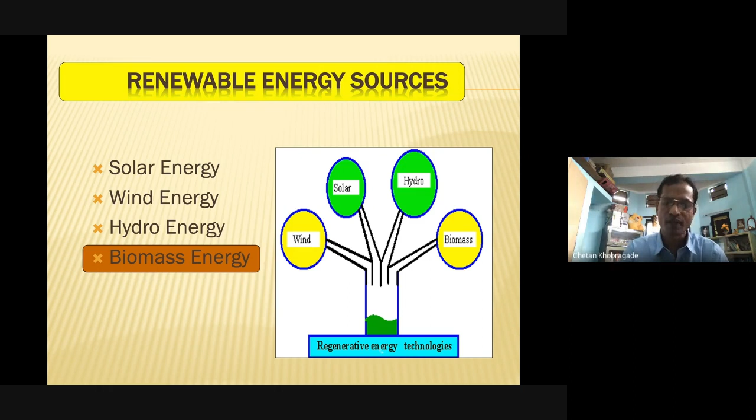Now, what is biomass? Biomass is basically obtained from plants and animals - roughly, you can simply say it is the waste of plants and animals. The exact technical definition of biomass is that it generally refers to renewable organic matter generated by plants through photosynthesis. Materials having organic combustible matter are also referred to as biomass. It is one of the important fuel sources in the world energy scenario.

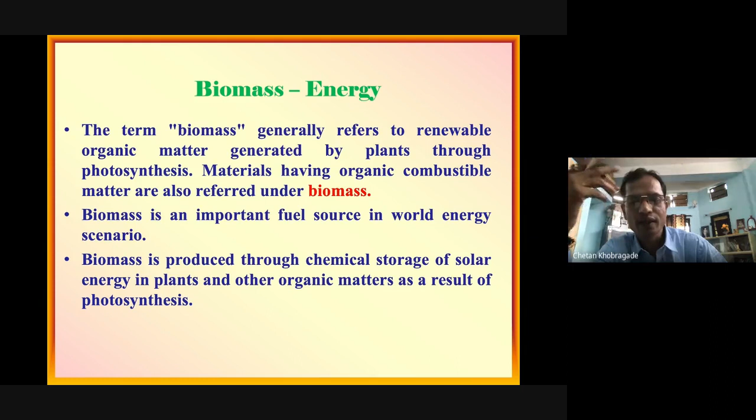It is produced through the chemical storage of solar energy in plants and other organic matter as a result of photosynthesis. Now, this is the present scenario of biomass availability in India. The availability of biomass or agriculture waste is in huge quantity, widely spread all over the country. As far as our country is concerned, total biomass available throughout the year is 1,250 million tons annually.

If we go for power generation from this 1,250 million tons, we can produce 17,000 megawatts of power from this biomass. At present, the government has promoted biomass-based power generation systems for decentralized power generation in the rural sector. Up till now, only 273 megawatts of power has been produced from biomass. This means we have so much scope.

Throughout India, per year we get 1,250 million tons of biomass, and if we convert this into power generation, we can produce 17,000 megawatts. But at present, we have achieved only 273 megawatts. This means we have abundant scope to convert this into power generation - we can go for power generation. So this is the clear picture from this slide.

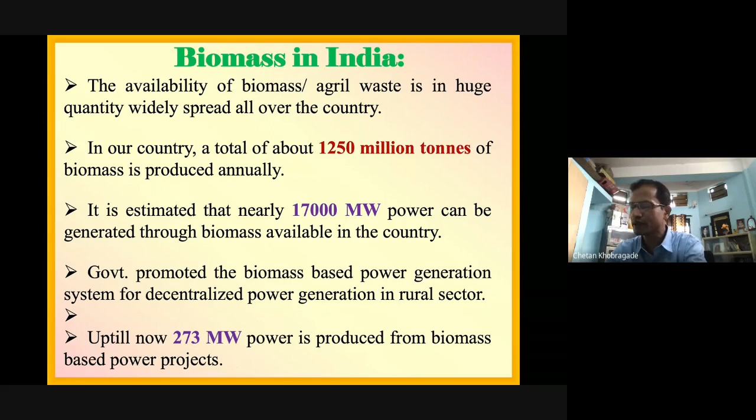Now this is the simple classification of biomass. Basically it's divided into three parts: one is plantation that produces energy, then natural vegetative growth, and organic waste and residues. Organic waste and residues is further classified into animal waste, forest waste, agricultural waste, urban waste, industrial waste, and municipal solid waste.

Now, first, plantation that produces energy. For example, we have land we cannot use for the agriculture sector, industrial sector, or household sector. In that case, we can use that land for energy purposes since it requires very low management and low water. We can grow selected strains like babul and subabul for energy purposes, and once grown, it requires very little management.

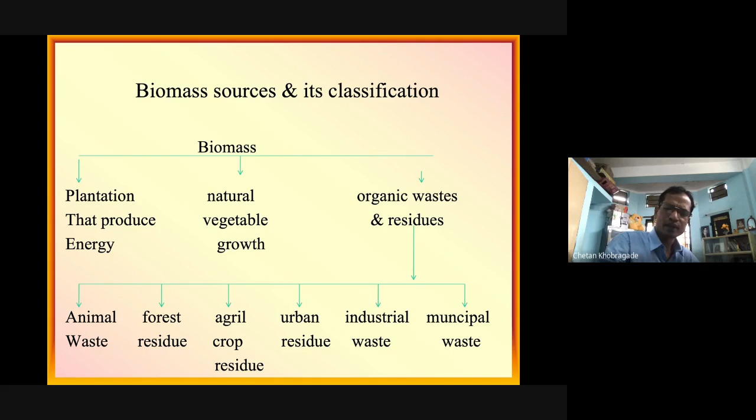Then there's natural vegetative growth, like bamboo - we never grow bamboo, it comes naturally. Then there's organic waste and residues: animal waste, forest waste, agriculture waste, and other waste. Now, what are the applications of biomass, where can we use it?

Direct combustion and cogeneration, production of biofuels such as ethanol and biodiesel, production of biogas through anaerobic digestion of biomass, and densification, also called briquetting or pelletization technology, and gasification technology to produce producer gas and charcoal. So these are the different applications of biomass.

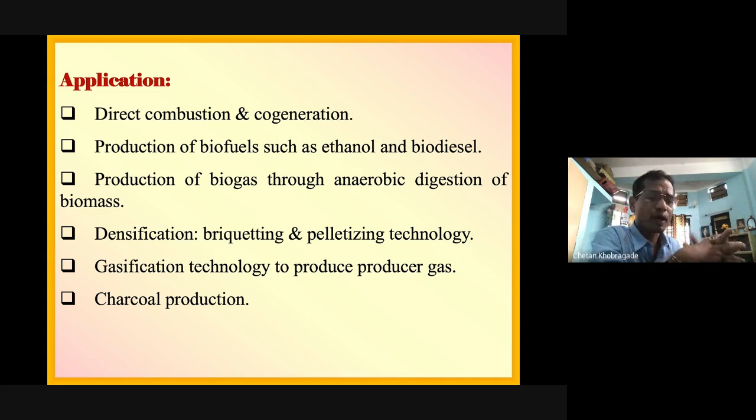Now we will concentrate in this seminar on densification. What is densification? What are briquettes and pelletization? And how can farmers use their biomass, and how can farmers collect biomass from the industrial sector?

For example, if there is a nearby industrial sector producing waste, farmers can collect that waste, dry it, and convert it into briquette form. Once converted into briquettes, they can sell it. So ultimately employment will be generated, and they can earn a handsome amount. Now what are the advantages of biomass?

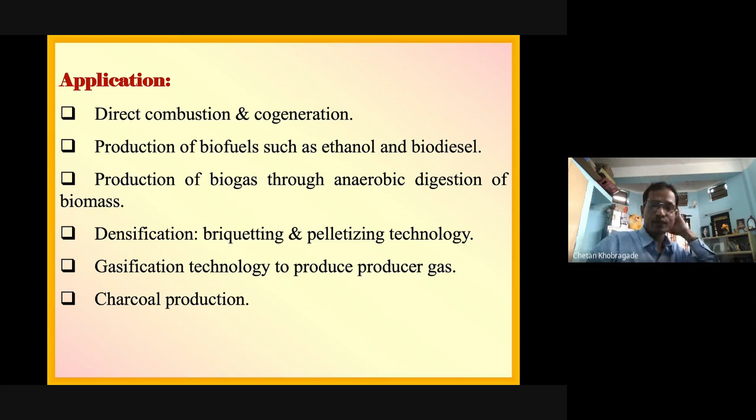It is widely available. The technology for production and conversion of biomass is very simple and easy to understand. Biomass energy is suitable for both small and large scale applications. Its production requires only low light intensity and only low temperature. Biomass energy incorporates storage facility, and hence transportation is easier.

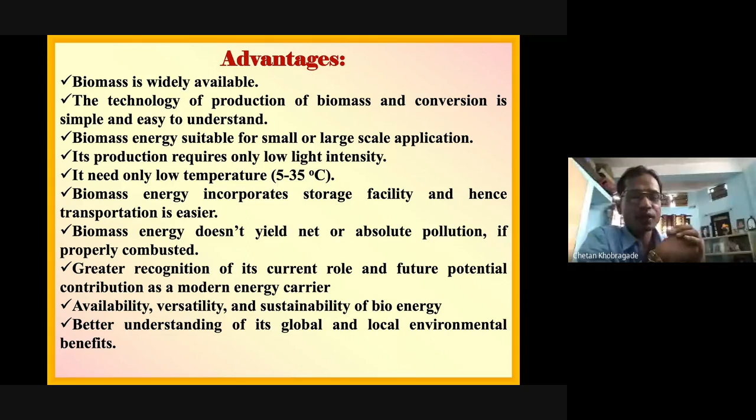Biomass energy does not yield net or absolute pollution if properly combusted. There is greater recognition of its current role and future potential contribution as a modern energy carrier - availability, versatility, and sustainability of bioenergy, along with better understanding of its global and local environmental benefits. So these are the advantages of biomass.

Now the history of the briquetting machine. We are going to concentrate only on densification, briquetting, and pelletization. What are these terms and what is the exact meaning of that?

In 1936, Jimmy Roger - we can say in simple language he is the father of the briquetting machine. What happened was he was a scientist working in a lab. One day he came out from his lab office and saw there were some dry leaves lying there, so he thought, why can't we convert this into some other form?

So he thought like this, and what he did was collect all the biomass - those dry leaves - and converted it into powder form, and tried to compress it. While compressing, he took a pipe and made a simple type of piston so that the biomass could be easily compressed.

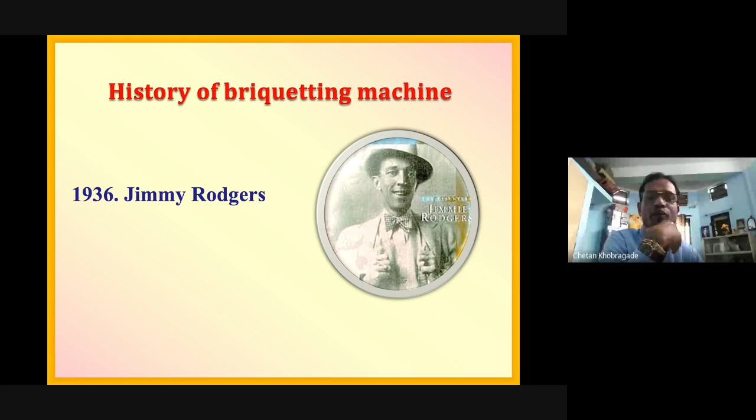Then he used some type of binding materials, like dung and waste flour. He did so many experiments. So from 1936, we simply consider that he is the father of the briquetting machine - Jimmy Rodgers, 1936.

Now, why do we need to convert such biomass into briquette form? Why do we need this? Because, see, what are the conventional methods people are using in traditional ways? Electricity they use for cooking purposes, kerosene, wood in villages they use wood, coal, LPG, etc. So these are the conventional methods people use for preparing food and other domestic purposes.

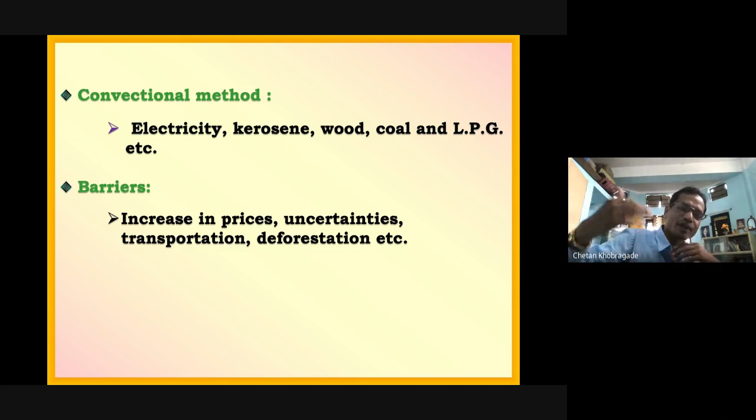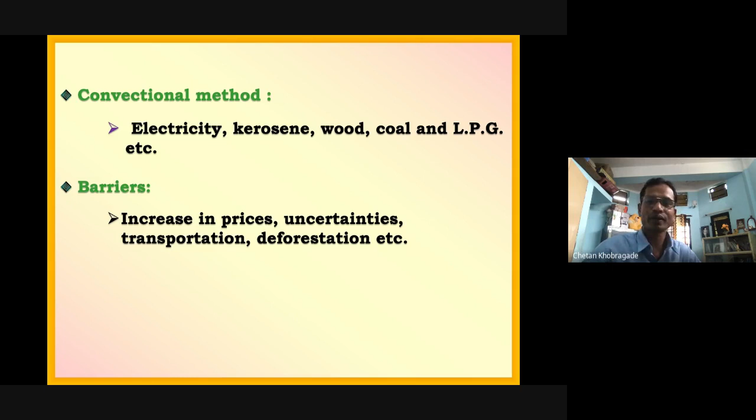Now, what are the barriers? Increase in prices, uncertainties, transportation, and deforestation. The LPG costs are increasing day by day, and definitely it will be increased. Uncertainties, transportation problems, deforestation problems. In villages, people are cutting woods and collecting them for cooking purposes. Deforestation is not good for our earth. So these are the barriers.

Now, what are the different types of drawbacks while using wood? So many women are generally engaged in collecting biomass for preparing their food. In some villages, small children are busy collecting wood and all these things, wasting the whole day on this type of work, and they are unable to go for their education because for day-to-day life they are struggling.

Apart from this, very important, once we use this type of wood for preparing food using such chulas, it produces so much smoke, and this smoke is even more dangerous than cigarette smoking. Women are generally directly exposed to this type of smoke. So it affects them, giving drawbacks like cancer diseases, lung diseases, and so many other diseases coming from this type of smoke.

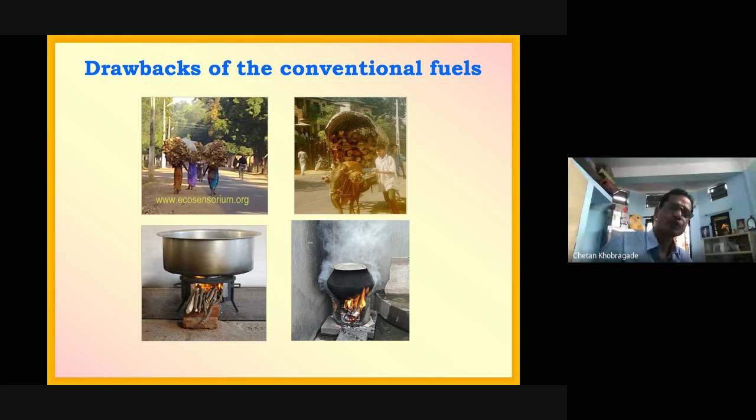So to avoid this type of smoke and to avoid these problems, we are supposed to go with the very best fuel, that is called briquettes.

Now why do we have need of biomass conversion technologies? Because, for example, rice husk has very low bulk density. Suppose we consider 1 meter by 1 meter by 1 meter volume, only say 5 or 10 kg of biomass we can put in it. But once we have compressed it, maybe 20 kg we can easily store. So we have increased the densification 4 times.

So why do we have need of biomass conversion technology? Because of the low bulk density, for easy transportation. Once we have compressed the biomass, we can easily transport it, reducing the transportation cost. We can easily handle the biomass, and also increase the calorific value. Huge biomass has low calorific value, and once compressed, the calorific value will increase for efficient use of biomass applications. So once we compress the biomass, we can easily use it, easily transport it, and also get good calorific value. These are the different advantages, that's why we have need of conversion technology.

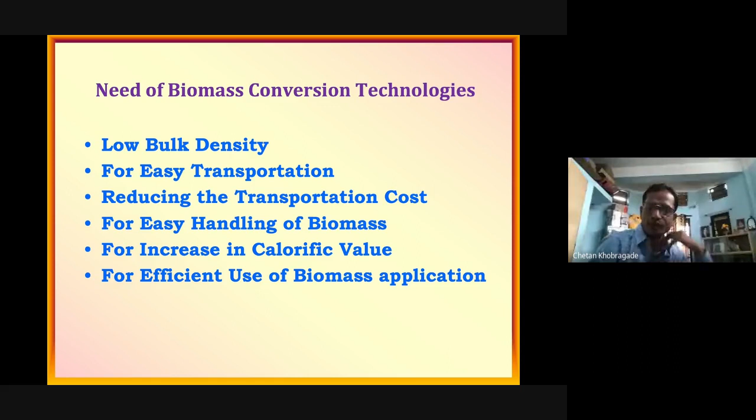Now what is the exact definition of densification? Densification means the compaction of loose material, or increasing the density of loose biomass so that its volumetric efficiency can be increased. This is the exact definition of densification. It is also called briquetting.

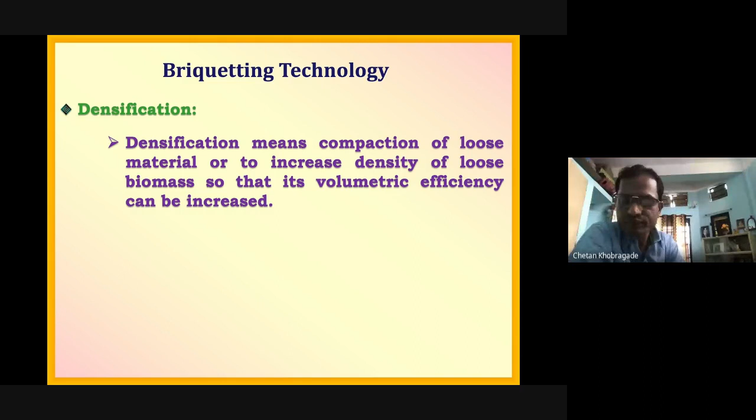Now there are various types of briquetting technology. One is the piston press, second is the roller press, and third is the screw press. Now the piston press - this is the piston press briquetting machine. In this technology, the pressure is applied discontinuously by the action of the piston on material packed into the cylinder.

This is the feeding hopper. Whatever biomass we want to use, as per availability nearby our places, we can use that type of biomass - say rice husk, saw waste, tea waste. I am working in Assam, so a lot of tea waste is available in this region. So that type of tea waste, I will first convert into powder form, then put that powder over here. This is the feeding hopper. Once it has come over here, it requires some proper binding materials like cow dung or waste flour.

That material I will put over here. This is the piston, this is the flywheel, it will operate this piston. The biomass will get compressed over here, and we will get the fresh briquettes. This portion is called the die. Now the briquettes will come out here, and obviously it will get a good shape and same size. This is the beauty of all briquetting machines, any briquetting machine.

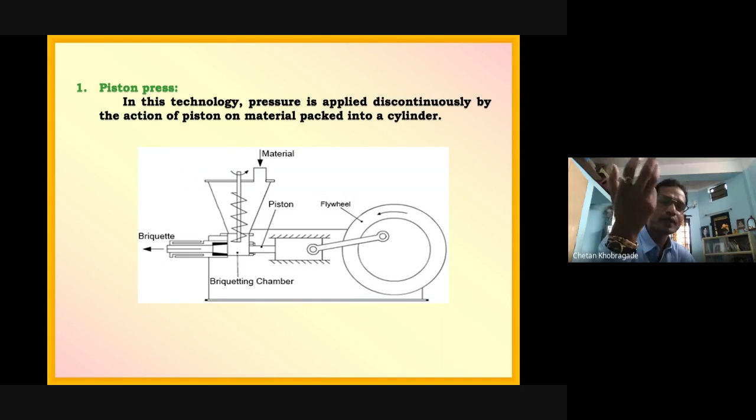Now this type of briquetting machine may be operated manually or operated by power. Once we have got the fresh briquettes, we'll go for the drying purpose. The sun gives us free solar energy, so we'll use that solar energy for drying purposes. Once it has dried, after 2 or 3 days depending on the temperature, we can use that type of briquettes. So this is about the piston press technology.

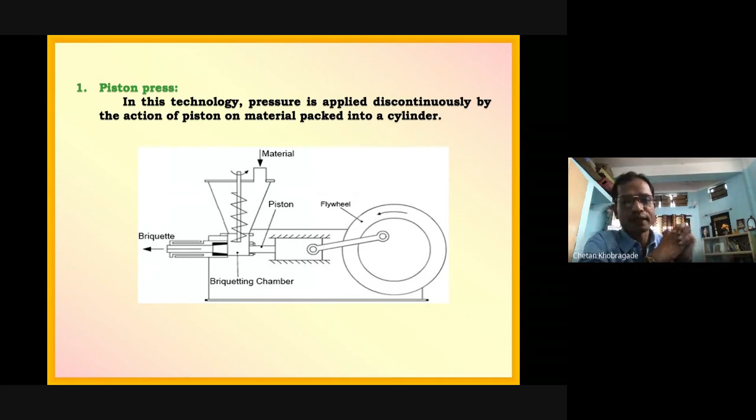What happened exactly over here? The pressure is applied discontinuously. So discontinuous pressure is used over here. In this technology, we get good quality briquettes, meaning compressed briquettes, compared to other briquetting machines.

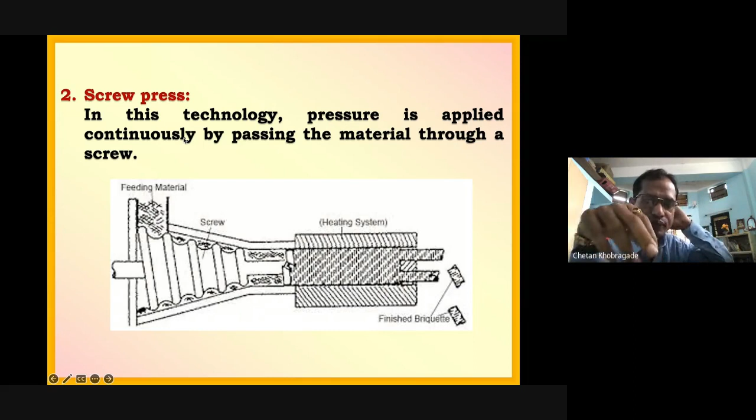Now, second technology, screw press technology. One is the piston press technology, second is the screw press technology. Now, in this technology, the pressure is applied continuously. What about the piston press? The pressure is applied discontinuously. Over here, the pressure is applied continuously by passing the materials through the screw.

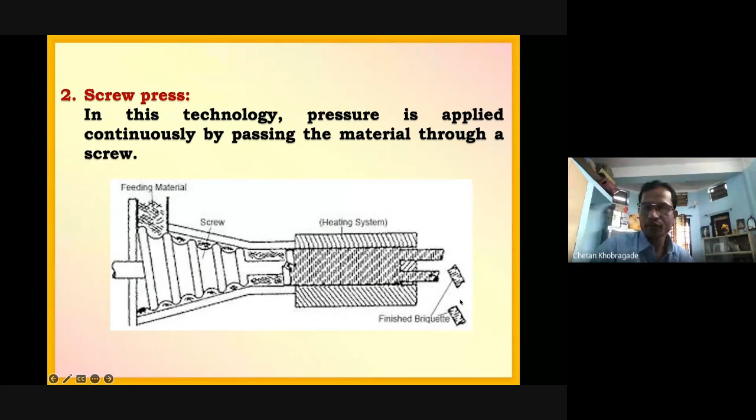Now, say for example, this is the screw. Okay, this is the feeding hopper. So we will put material over here. Okay, now this screw will compress it. So ultimately, what will happen? The pressure will be applied continuously. Okay, and through this die, we'll get the briquettes. And this is maybe the driven pulley, with an electric motor, or whatever, or we can even make it into a pedal operated machine also.

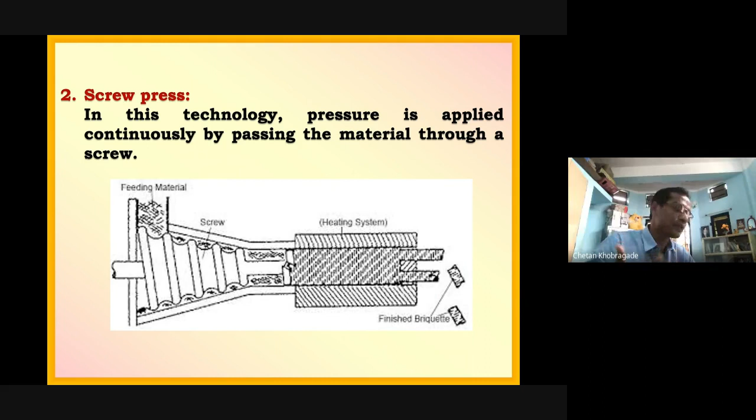So here we will not get very good quality, what do you call that, pressurized briquettes compared to the piston press technology. Okay, now the third one is the roller press technology. Roller press technology or pellet press technology.

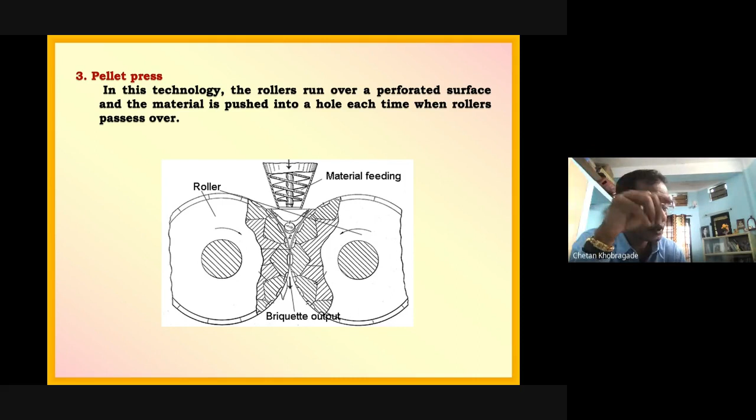The diameter of these compressed briquettes in this technology is less than 2.5 centimeter. So that's why they are called pellets. So if the diameter is greater than 2.5 centimeter, then it is called a briquette. If the diameter is less than 2.5 centimeter, then it is called a pellet. So that's why roller press technology is called pellet press technology.

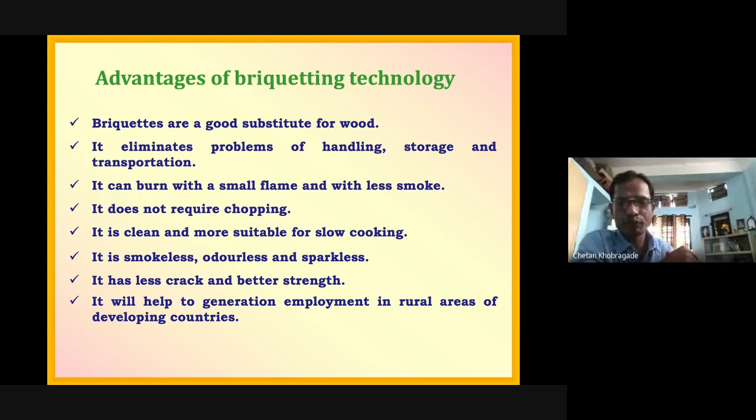Now, what are the advantages of the briquetting technology? Briquettes are a good substitute for wood. It eliminates the problem of handling, storage, and transportation. It can burn with a small flame with less smoke. It does not require chopping. It is clean and more suitable for slow cooking. It is smokeless, odorless, and sparkless. It has less cracking and better strength. It will also help to generate employment in rural areas of developing countries.

Now, we have already discussed the briquetting technology. What is briquetting? What is densification? Briquetting and densification are the same. Now, there are three types of technology we have discussed. Now we have seen the advantages of the briquetting technology. Now, the applications of the briquettes, where we can use them.

We can use them in boilers for steam generation. We can use them in food processing industries for distilleries, bakeries, canteens, restaurants, and drying purposes. Textile process houses, dyeing and bleaching, agro products, tea drying, oil milling, clay products, brick kilns, tile making and pot firing. For domestic purposes we can use them for cooking and water heating.

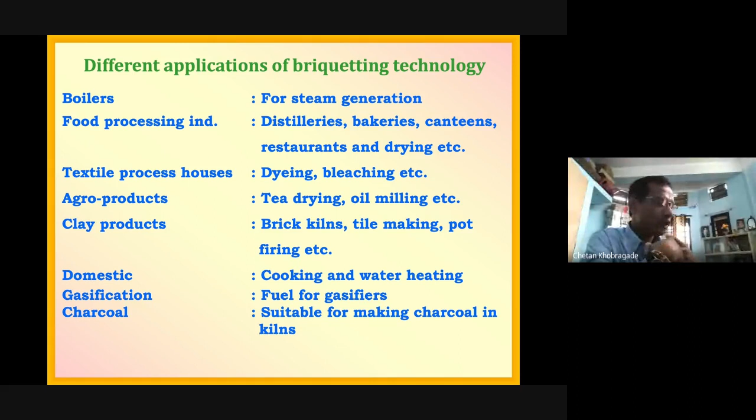In gasification technology we can use them as a fuel for the gasifiers. In charcoal production they are suitable for making charcoal in kilns. So these are the different applications of the briquetting technology. Wherever we are going to burn any fuels, in place of those fuels we can use the briquettes, in simple words.

Now, in my department, we have developed two to three types of briquetting machines. One is the pedal press briquetting machine. I will just show the videos, madam will share. So this type of raw biomass I have used. Tea waste is abundantly available in Assam, so we have taken the tea waste. We converted it into powder form, then rice husk, and then cow dung as a binding material.

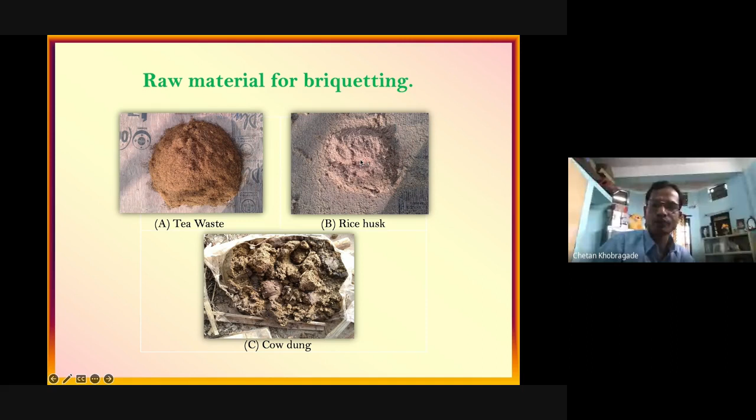Okay, then we have gone for the drying, and then we tested. We measured the resistance to water penetration, then calorific value, bulk density. Then we used the briquettes for cooking purposes. We tested them in an improved cook stove, and we found very good results with these briquettes.

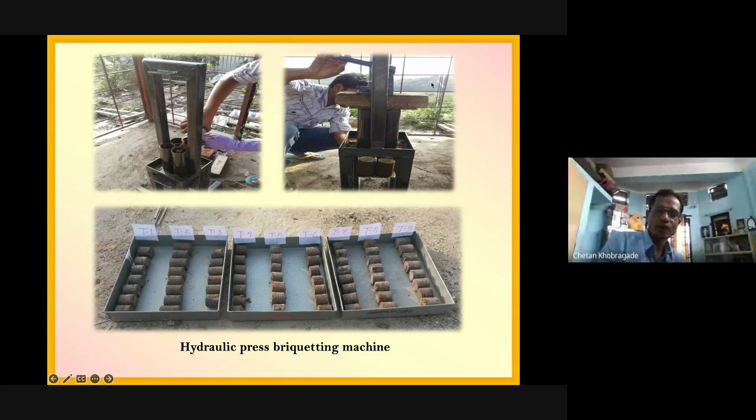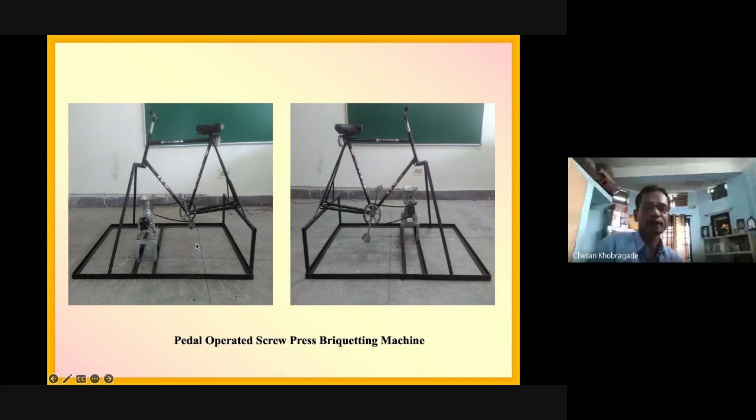Now say for example, tea waste over here. When we collected this tea waste, the manager gave us the tea waste free of cost. But say for example, consider 1 to 2 rupees for collecting the tea waste. Okay, so once we have converted it into briquettes, the approximate cost depends on the city. Okay, but roughly approximately 20 rupees per kg is the briquette cost. So now I would like to say that the farmers can collect their own waste, convert it into briquette form, and they can earn money.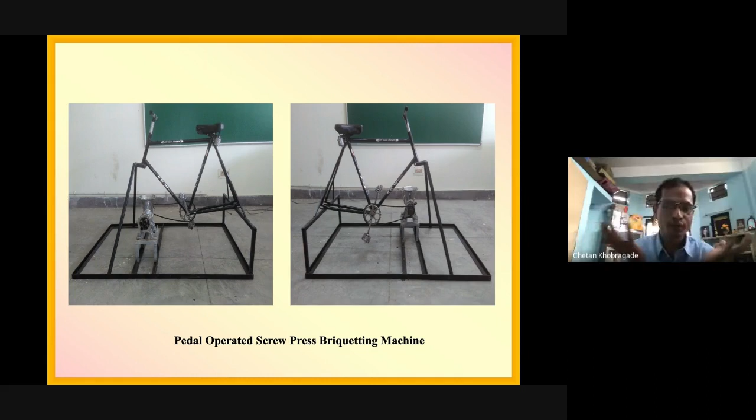Now, cost economics of the briquetting machine. Say for example, our students developed the briquetting machine and we calculated the net present worth, benefit cost ratio and payback period. Net present worth means, say for example, just like LIC, when we add some amount every year, after 10 years, 20 years, how much amount we get back. Okay, and then benefit cost ratio means benefit in each year divided by cost in each year. That ratio should be greater than 1. It means the machine is technically as well as economically feasible. Now the payback period means after a certain time our cost will be returned. That is called the payback period.

Now for this calculation, there are many assumptions, like operating life of the system is 10 years, approximately assumed on the basis of research papers. The briquetting machine can operate 8 hours per day. The maintenance cost is, say, 6% of the initial investment. Annual working days is 300 days. The discount rate is 10%. Discount rate means, say the farmers don't have sufficient money, so they take a loan from the banks; in simple words, the rate of interest. Then raw material cost: rice husk approximately 1 rupee per kg, fresh cow dung 1 rupee per kg, tea waste 1 rupee per kg. The selling cost, this is the old cost; at present, 15 to 20 rupees per kg.

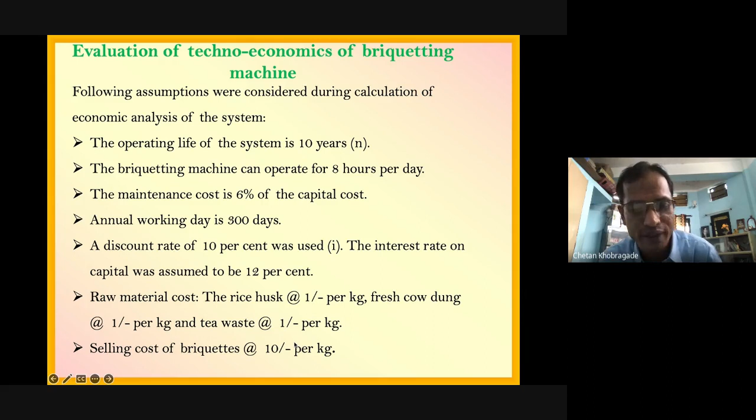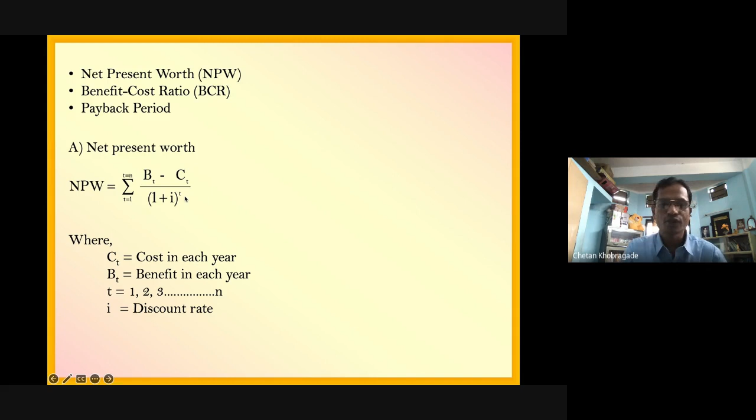So according to that, these are the empirical equations for calculating the net present worth, benefit cost ratio and payback period. Benefit in each year minus cost in each year divided by 1 plus i, where i means rate of interest, to the power t, where t means time. That is net present worth. Now the benefit cost ratio is the summation of benefit in each year divided by summation of cost in each year.

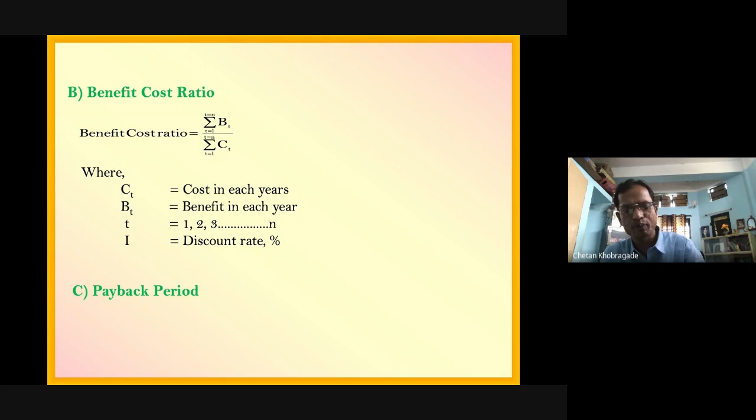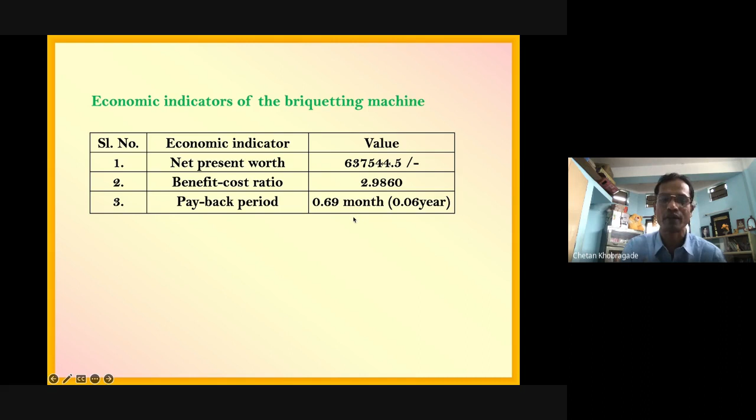Madam, can you show that video, madam? Hello? Should I share the presentation now? Yes, madam. Video. Yeah, sure, sir.

So this is the pedal operated briquetting machine. Our students developed it under my supervision, and they are operating the briquetting machine. We used saw waste, tea waste, and cow dung. We mixed them in different ratios, and once we got the briquettes, we went for drying, then we tested them in the improved cook stove, and we studied the calorific value, benefit cost ratio, all these things.

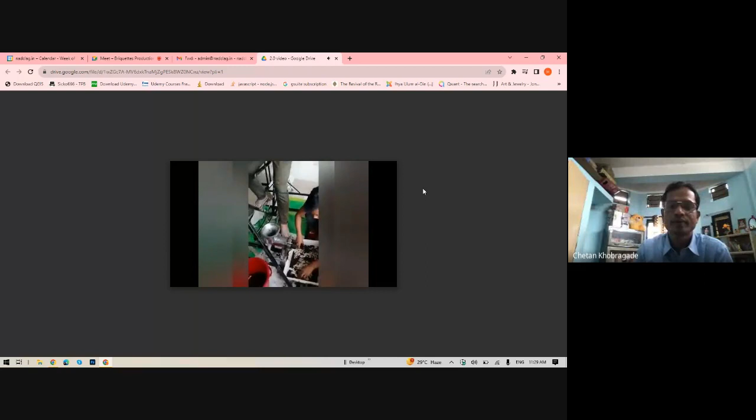Two persons should be there. Okay, one for operating and one for collecting all the things.